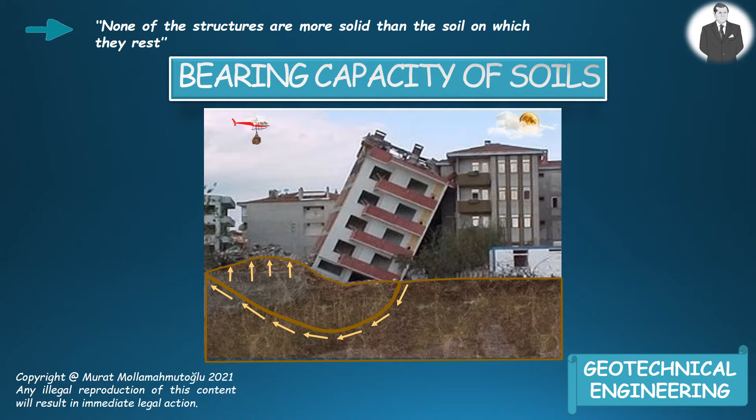Welcome to lecture. What I would like to present to you today is bearing capacity of soils with respect to shallow foundations. The lowest part of a structure is usually named as foundation, as you see in the figure here. And its duty is to deliver the load of the structure to the soil where it is resting.

Suitable design needs that the load transmitted should not overstress the soil, because overstressing of soil might bring about excessive settlement or shear failure of soil, which would impair the structure. Therefore, for geotechnical and structural engineers interested in foundation design, it is vital to evaluate the safe bearing capacity of soils. A foundation design has to satisfy two fundamental requirements.

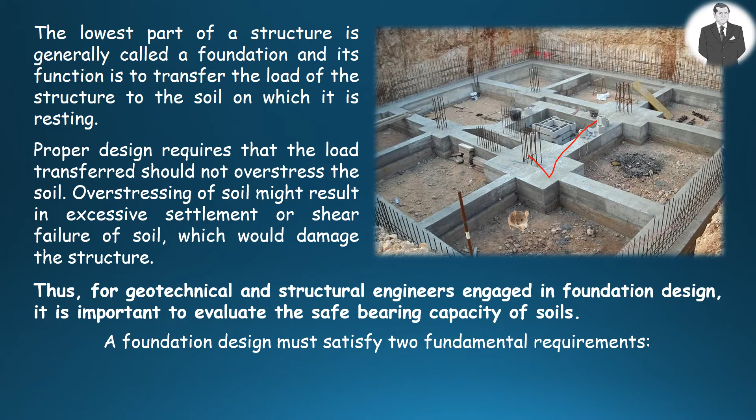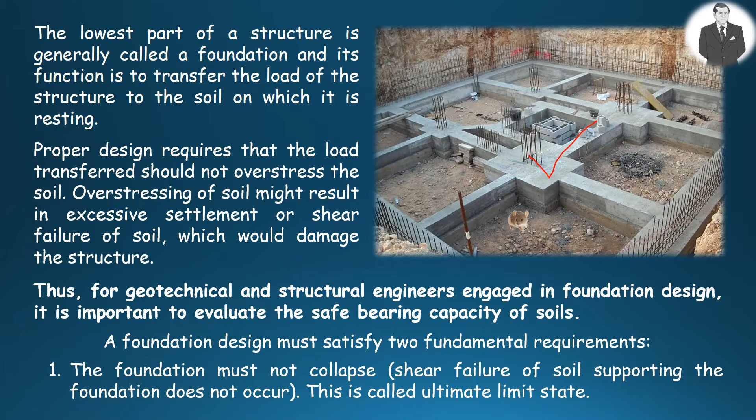The first one is the foundation must not fall down. That is to say, the shear failure of soil supporting the foundation does not take place. This is called the ultimate limit state. The second one is settlement of foundation must be within tolerable limits so that the design function of the structure is not damaged. This is called serviceability limit.

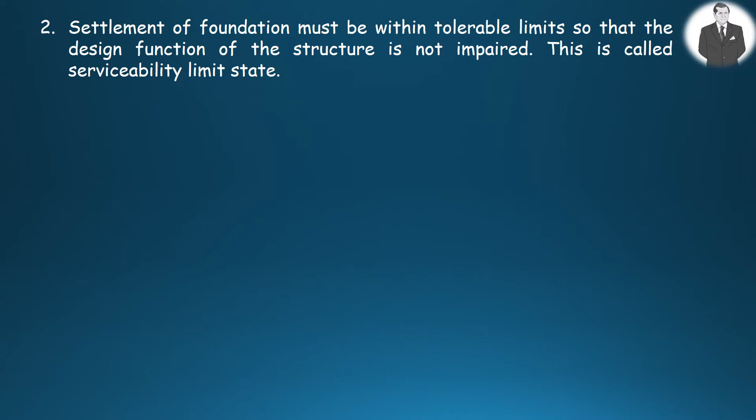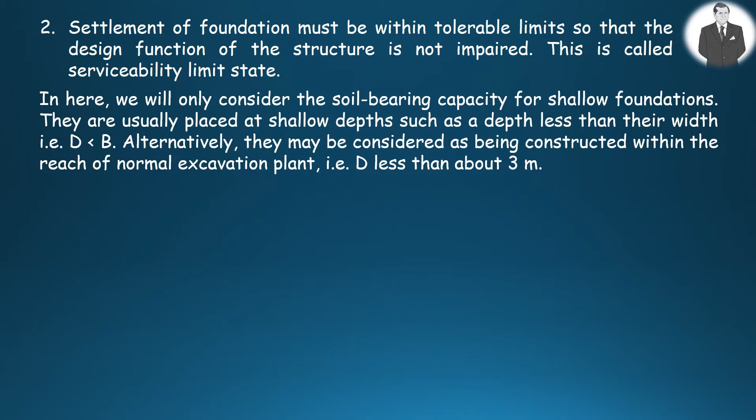There are two design procedures adopted in practice. One is allowable stress design, which is ASD in short, and the other is load and resistance factor design, which is LRFD in short. In ASD design method, the ultimate load resistance is obtained, and then this is divided by a factor of safety to get the allowable load or stress. ASD is the conventional design method. LRFD is dependent on reliability methods regarding the uncertainties in loads, soil resistance, method of analysis, and construction. The loads are multiplied by load factors, usually greater than 1, in different combinations, and the ultimate soil resistance is multiplied by a factor called the performance factor, usually less than 1.

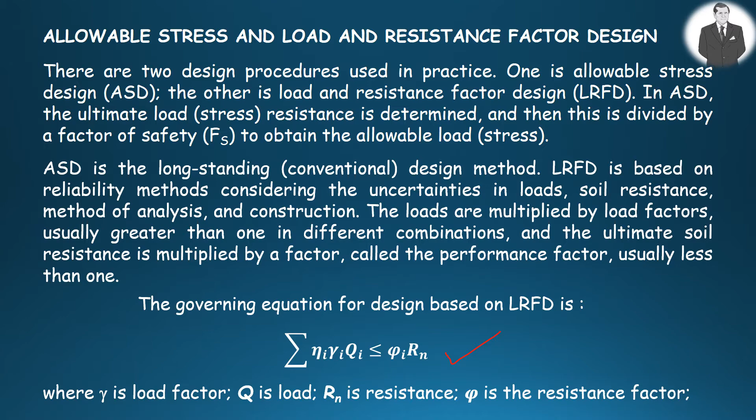The governing equation for design dependent on LRFD is given here, where gamma is load factor, Q is load, capital R sub n is resistance, and phi is the resistance factor. Gamma and phi are the same symbols as unit weight and the internal friction angle of soil, so do not mix them. Eta is a ductility, redundancy, and importance factor. And i is the load type, such as dead load or live load, and the resistance type.

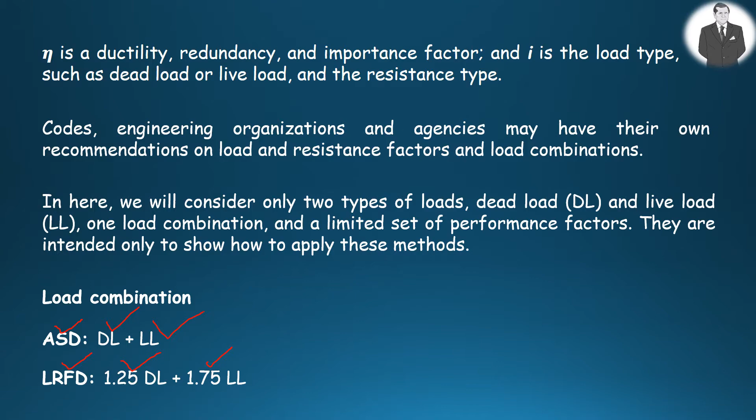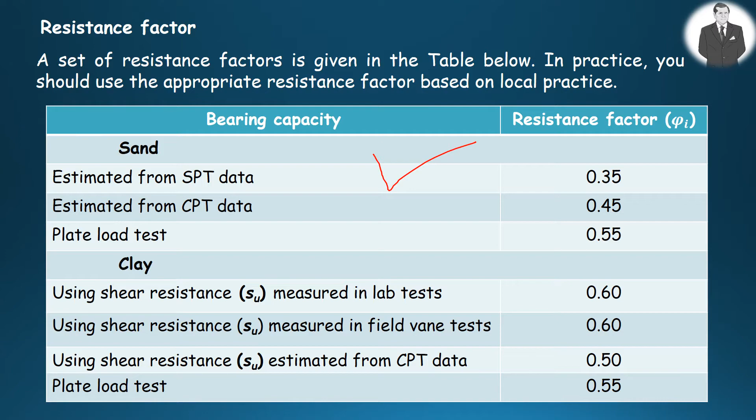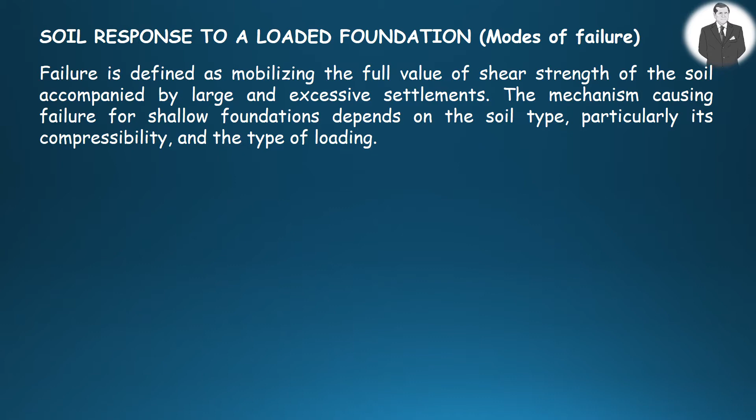The second type of failure mode is called local shear failure. Its characteristics are well-defined slip surfaces just below the foundation, but these slip surfaces fail to extend to the ground level. Large vertical displacements are needed before the slip surfaces appear at ground level. Some heaving takes place on both sides, as you see in the figure, with no tilting and no catastrophic failure of foundation, and no peak value and ultimate value not defined, as you see in the figure here. This type of failure takes place in moderate compressible soil and medium dense sands.

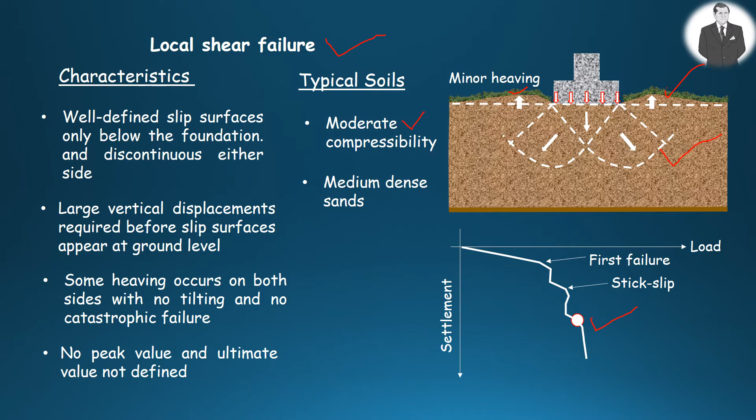The third type of failure mode is named punching shear failure. Its characteristics are well-defined slip surfaces only below the foundation, as you see here, and they don't spread on both sides. Large vertical displacements are produced by soil compressibility, with no heaving, no tilting or catastrophic failure. And there is no ultimate value, as you see in the figure here. Compression will densify the soil.

This type of failure takes place in highly compressible soils: very loose sands, partially saturated clays, normally consolidated clay in drained condition when the soil is subjected to very slow loading, and peats, in other words, organic soils.

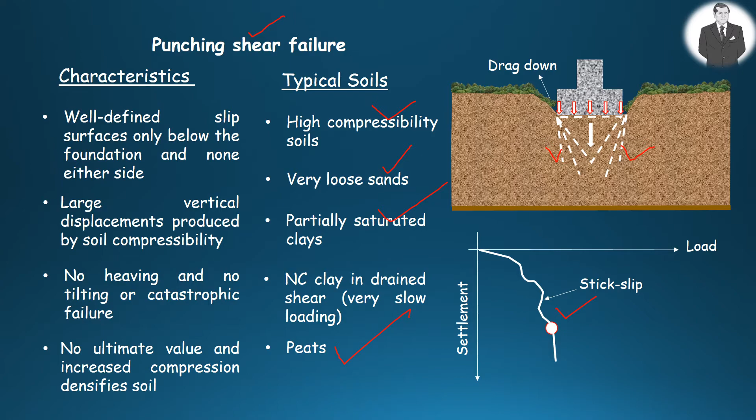An expression for bearing capacity is dependent on the failure mechanism for a rough strip footing embedded at a depth Df measured from the ground surface, as you see in the figure, where the soil in zones 1, 2, and 3 is in a state of plastic equilibrium. The active Rankine zone is pushed downwards, and in turn this pushes the radial shear zones sideways and the passive Rankine zones both sideways and upwards. The rupture lines JD and JE are arcs of a logarithmic spiral, as you see here.

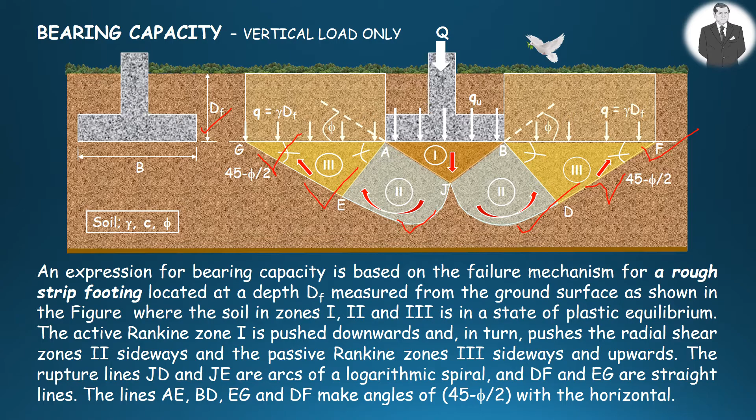DF and EG, as shown in the figure, are straight lines. The lines AE, BD, EG, and DF make angles of 45 minus phi over 2, as illustrated in the figure here. If the load per unit area is applied to the footing, as you see here in the free body diagram of the soil wedge, and if general shear failure takes place, we may say that passive force is acting on each face of the soil wedge ABJ, as you see in the figure here. In this case, passive force should be inclined at an angle phi to the perpendicular drawn to the wedge faces. Since AJ and BJ are inclined at an angle phi to the horizontal, the direction of passive forces should be vertical.

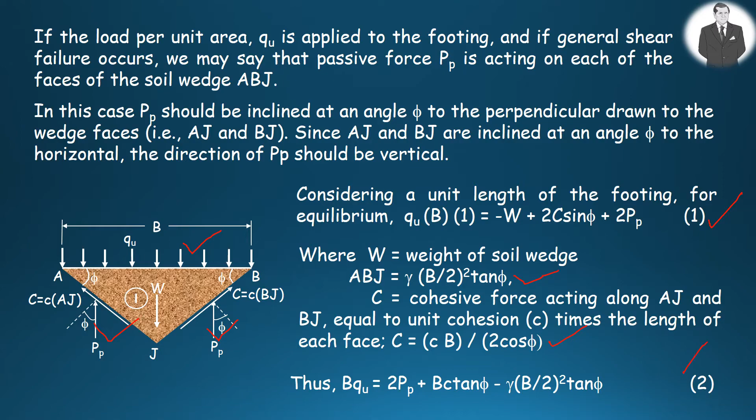Now, considering the free body diagram of the soil wedge and a unit length of the footing, for equilibrium, equation 1 can be written, where W is the weight of the soil wedge, and ABJ is equal to the definition given here, where C is the cohesive force acting along AJ and BJ, equal to unit cohesion times the length of each face, as expressed here. Therefore, equation 2 can simply be obtained. Substituting equation 2 into equation 1, we get equation 4 as presented here. Equation 4 can be written in the form given in equation 5.

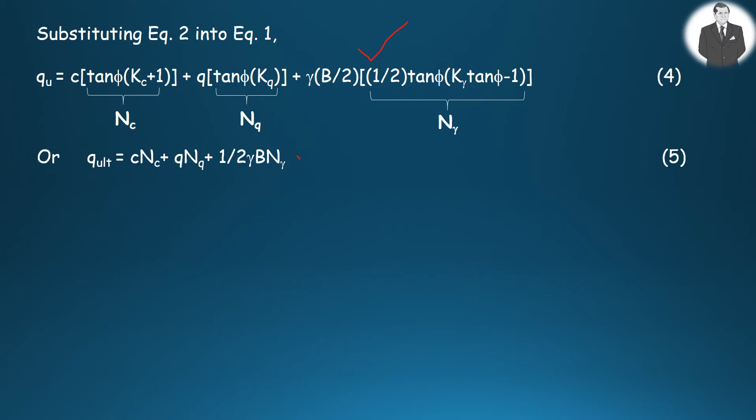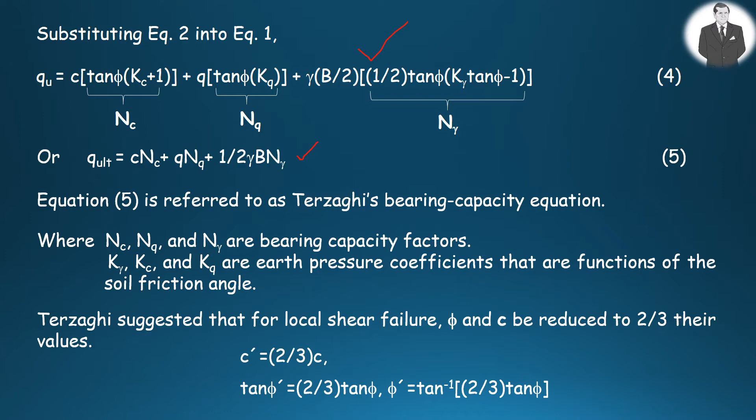This equation is referred to as Terzaghi's bearing capacity equation, in which Nc, Nq, and N gamma are bearing capacity factors. K gamma, Kc, and Kq are earth pressure coefficients, which are functions of the soil friction angle. Terzaghi recommended that for local shear failure, the internal friction angle and the cohesion should be reduced to 0.67 times their values, or as formulated here. Nevertheless, we will consider only the equations for general shear failure that has gained common use in geotechnical practice.

After the development of Terzaghi's bearing capacity equation, several researchers such as Meyerhof, Hansen, and Vesic worked in this area and clarified the solution. Different solutions show that the bearing capacity factors Nc and Nq do not change much and are recommended as follows. However, for a given value of phi, the values of N gamma obtained by the above-mentioned researchers vary widely. The difference is due to the variation of the assumption of the wedge shape of soil located directly beneath the footing. So, the more conservative expression is given by Hansen. But for all practical purposes, keep in mind that Terzaghi's bearing capacity factors will lead to good results.

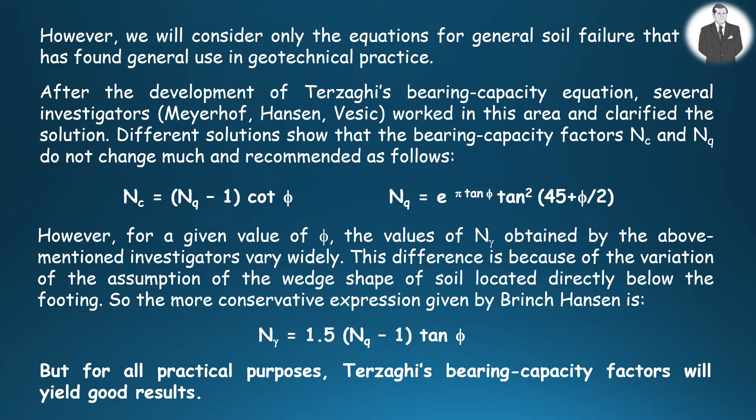The soil bearing capacity equation for a strip footing produced by Terzaghi is modified for general use by including the following factors. Since the Terzaghi equation was produced for a strip foundation where the shearing of soil was presumed in only 2 dimensions, however, for rectangular foundations, the shearing of soil will also happen at the ends, causing an enhanced end effect. On the other hand, for circular and square foundations, a 3-dimensional mass of soil will be sheared.

These effects are taken into account in a semi-empirical manner by modifying the equation using the shape factors Sc and Sq. The shape factor S gamma, related to the self-weight term, provides a reduction of bearing capacity due to shape because of the reduced confinement of the soil provided by rectangular, square, or circular foundations. Shape factors from Hansen are adopted here and given below.

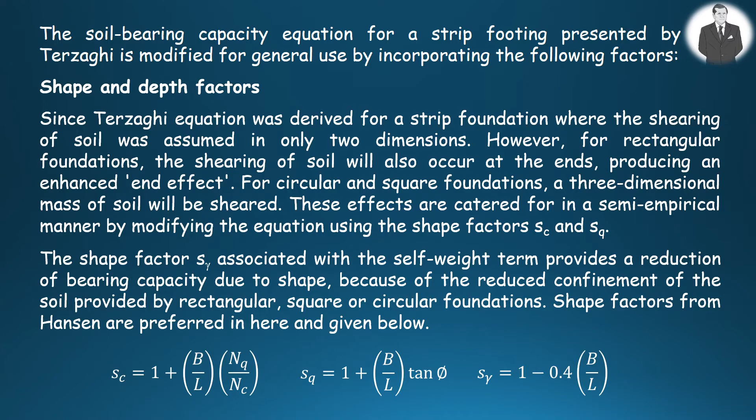Depth factors contribute to the bearing capacity of soil, which could be obtained from shearing through the soil above the foundation level. Expressions for depth factors taken from Hansen are presented here. And when D sub F is greater than B, which means when the embedded depth of foundation is greater than its width, D sub F over B should be replaced by tangent to the power of -1 times D sub F over B.

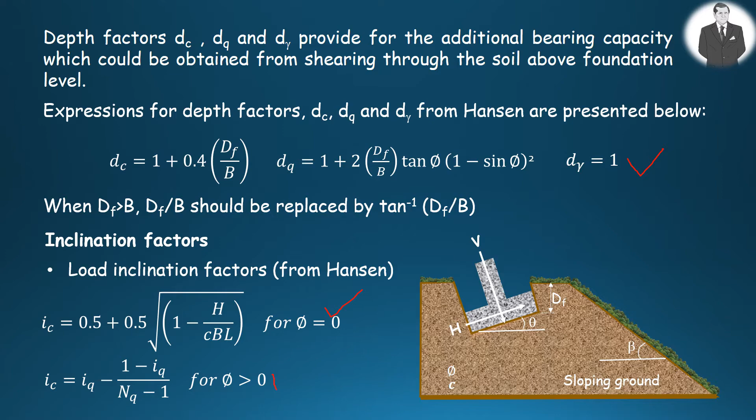Inclination factors are also adopted from Hansen. When the internal friction angle is 0, we use the first expression. When the internal friction angle is greater than 0, we use the second expression. Other inclination factors are also presented here.

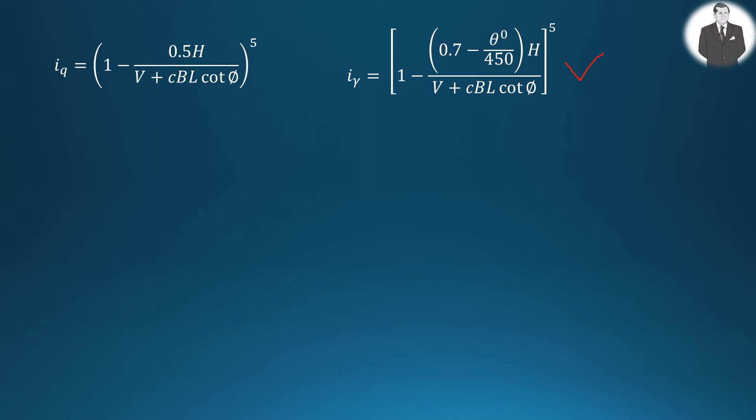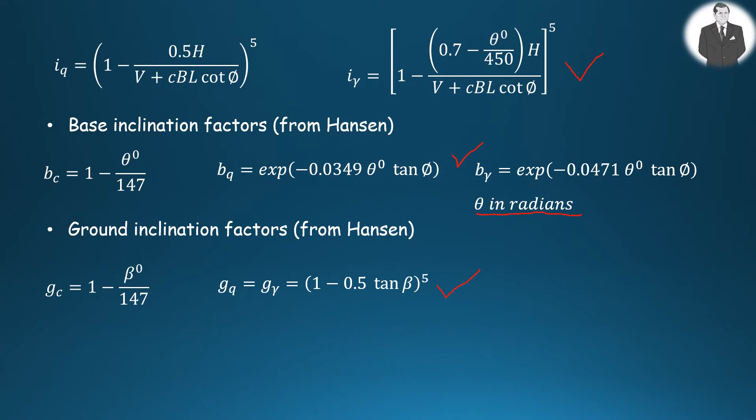Base inclination factors adopted from Hansen are also shown here. Bear in mind that theta to be used in these expressions should be in radians. And finally, ground inclination factors. They are taken from Hansen as well and given here. Now, including all these factors in the general bearing capacity equation put forward by Terzaghi, we get the modified general bearing capacity as shown here.

The question is, it appears that there are several general equations for estimating soil bearing capacity currently in use, put forward by Terzaghi, Meyerhof, Hansen, and Vesic. Are there any differences between them? Or which one is preferable? Well, as a result of observations, the following can be considered in selecting one of them.

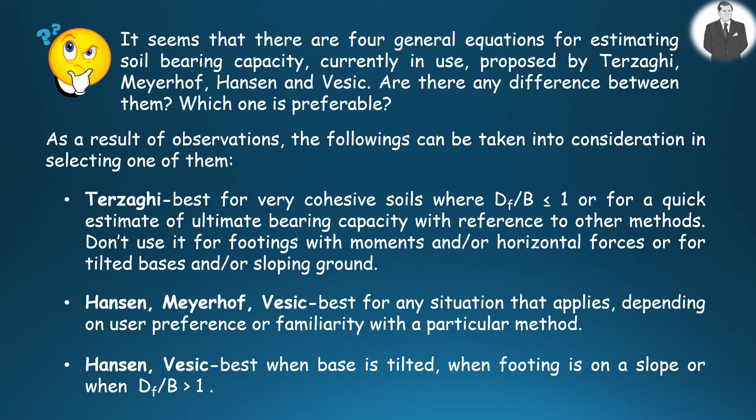Terzaghi is best for very cohesive soils where D sub F over B is less than or equal to unity, or for a quick estimate of ultimate bearing capacity with reference to other methods. But don't use it for footings with moments and/or horizontal forces, or for tilted bases and sloping ground. Hansen, Meyerhof, and Vesic are best for any situation that applies, depending on the user's choice or familiarity with a particular method. Hansen and Vesic are best when the base is tilted, when the footing is on a slope, or when D sub F over B is greater than unity.

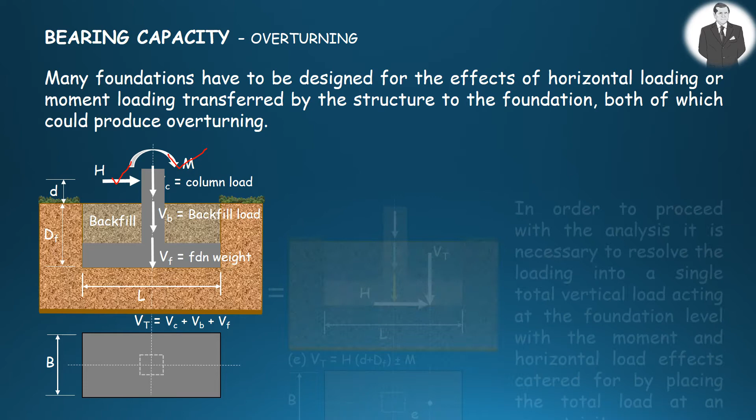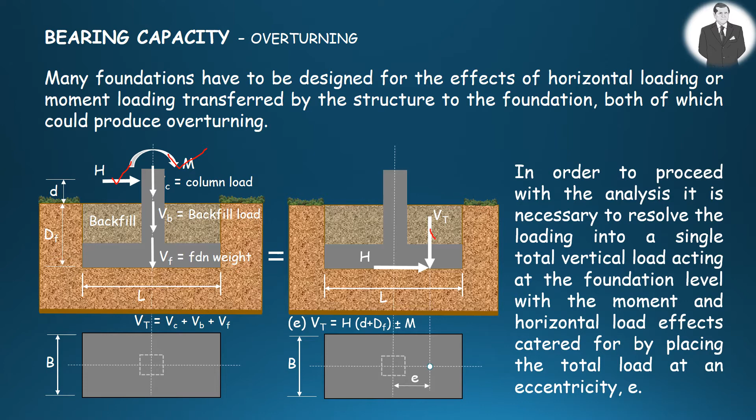Many foundations have to be designed for the effects of horizontal loading or moment loading delivered by the structure to the foundation, both of which could lead to overturning. In order to carry out the analysis, it is vital to resolve the loading into a single total vertical load acting at the foundation level, with the moment and horizontal load effects taken into consideration by placing the total load at an eccentricity E as shown in the figure.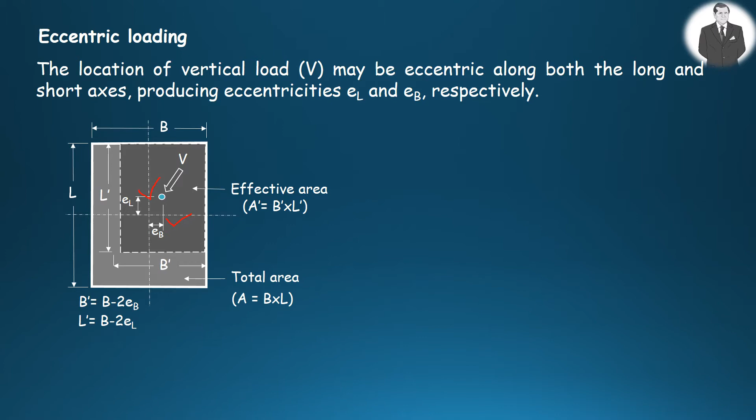The location of the vertical load may be eccentric along both the long and short axis, as you see in the figure here, leading to eccentricities E sub L and E sub B respectively. A convenient and conservative approach assumes that the vertical load acts centrally on an effective foundation area, as you see in the figure, ignoring the area outside of this effective area. So the bearing capacity equation for central vertical loading can be employed. So the general bearing capacity expression is then rearranged accordingly as shown here.

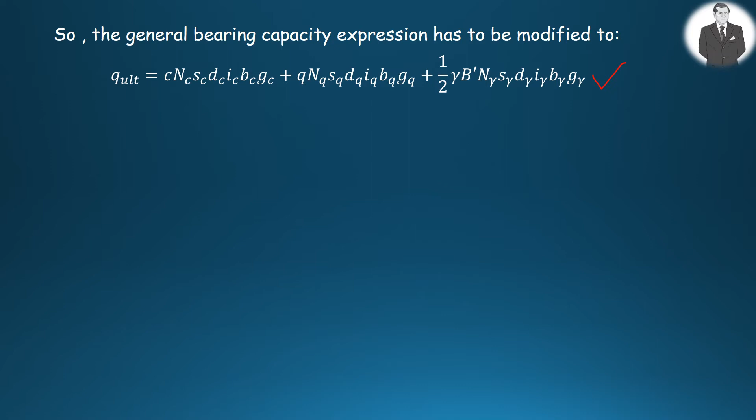Are there other factors that may affect the bearing capacity of soil? Yes, different soil strength. The undrained condition in clay soil, which is the short-term condition: the bearing capacity of cohesive soils with low permeability is the most critical one immediately after construction, before the excess pore pressure has time to dissipate. This is the undrained condition. In this case, the shear strength parameters are represented by undrained cohesion intercept or undrained shear strength, and undrained internal friction angle, which is equal to 0. This condition will lead to the bearing capacity expression as formulated here.

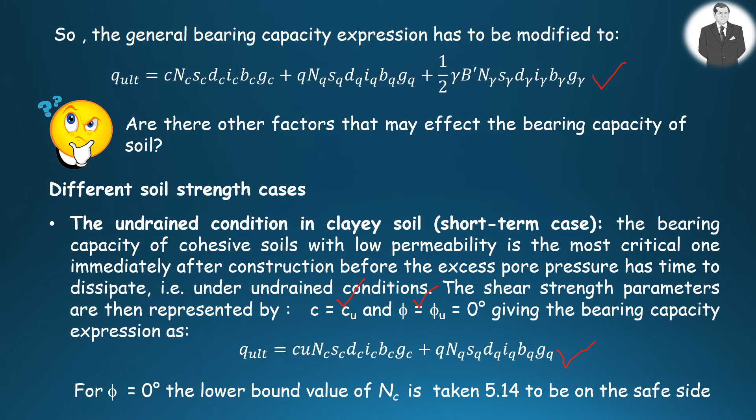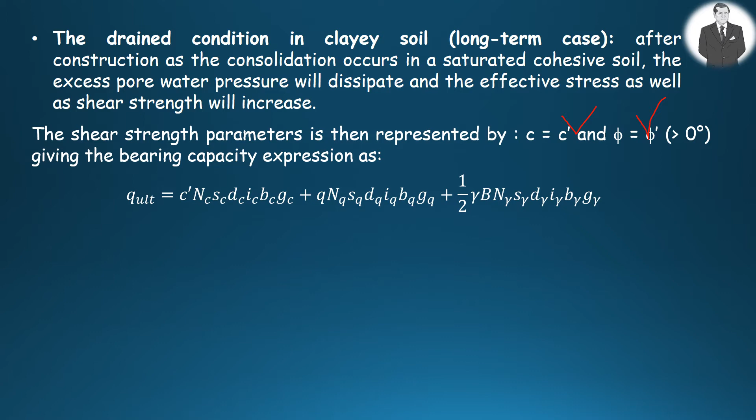For internal friction angle equal to 0, the lower bound value of N sub C is then taken as 5.14 to be on the safe side. The drained condition in clayey soil, which is the long-term case. After construction, as consolidation takes place in a saturated cohesive soil, the excess pore pressure will dissipate and the effective stress will increase, thus increasing the shear strength of soil. Shear strength parameters are then represented by C prime and phi prime, which is greater than 0. And the ultimate bearing capacity should be rearranged accordingly as shown here.

Now, another condition is the drained condition in sand, short and long-term cases. The allowable bearing capacity of sand depends primarily on the relative density, stress history, the position of water with respect to foundation level, and the size of the footing. Of secondary importance are particle shape and size distribution. The shear strength parameters are then represented by C prime and phi prime. Phi prime is greater than 0. And the bearing capacity formula should be rearranged accordingly as presented here.

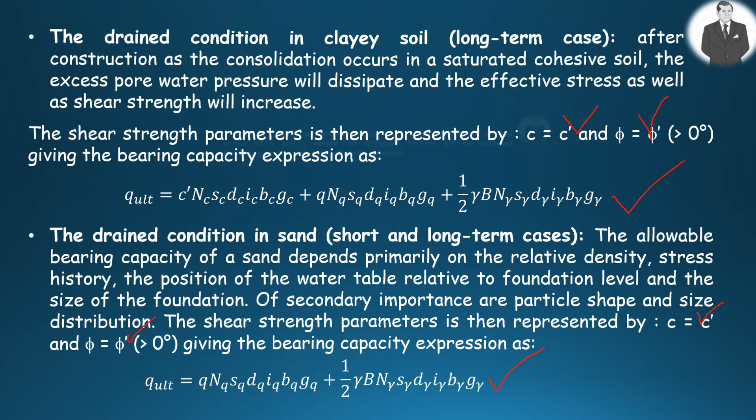Shape, depth, and inclination factors depend on the choice of cohesion intercept and internal friction values as well. Therefore, different factors will be obtained based on the soil strength case assumed.

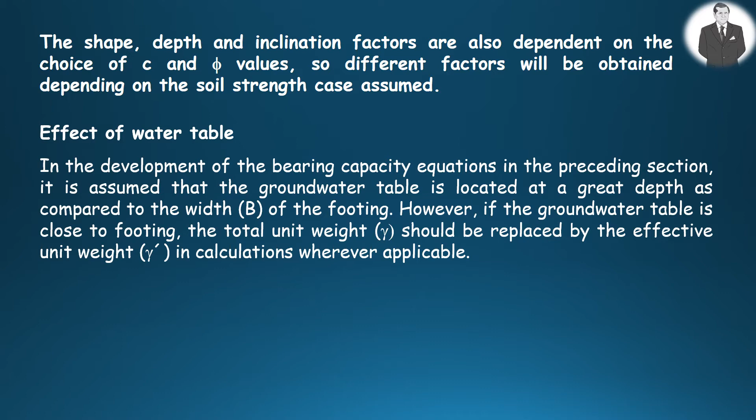In the derivation of the bearing capacity equations in the previous section, it is presumed that the groundwater table is located at a great depth with respect to the width of the footing. Nevertheless, if the groundwater table is close to the footing, the total unit weight should be replaced by the effective unit weight in calculations wherever applicable. Now, if the water table lies B meters, which is the width of the footing as you see in the figure, or more below the foundation base, then the general bearing capacity equation does not need modification.

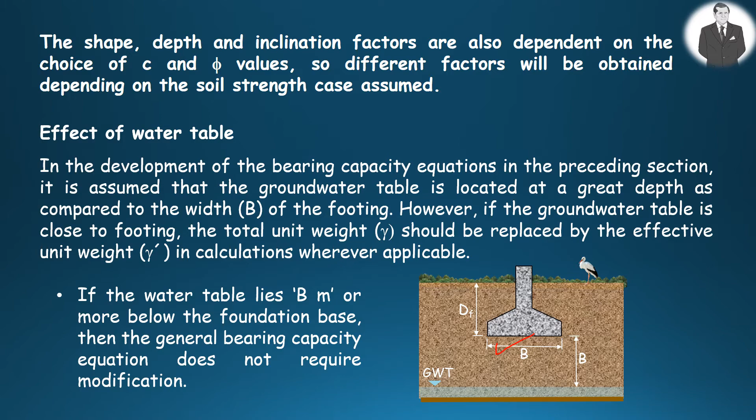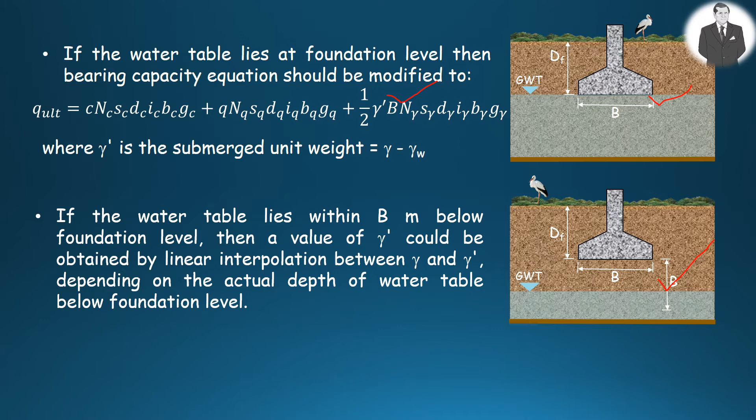If the water table is just beneath the base of the footing as shown in the figure, then the bearing capacity equation should be modified accordingly, where gamma prime is the submerged unit weight of soil. If the water table lies within B meters below the foundation level, as illustrated in the figure here, then a value of gamma prime could be obtained by linear interpolation between total and effective unit weight depending on the actual depth of the water table beneath the foundation level. Since the water table is likely to fluctuate during the life of the structure, it would be reasonable to adopt gamma prime regardless of water table.

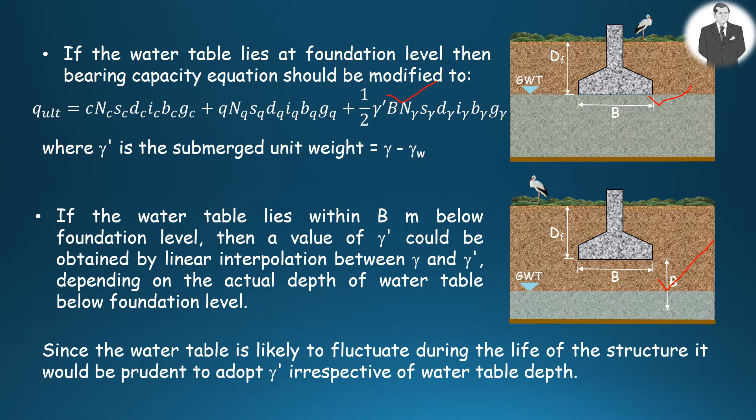If the water table is above the base of the footing as shown in the figure here, or at the ground surface, then the bearing capacity equation should be altered accordingly as illustrated here, where q prime is equal to gamma prime times h sub w. H sub w is the height of water from the base of the footing.

No simple satisfactory analytical method is now available to determine the bearing capacity of layered soils. A geotechnical engineer can apply a set of practical guidelines or use numerical tools such as the finite element method for analyzing layered soils. The basic problem, however, lies in determining and defining the soil parameters for those soils. We will refer to some practical guidelines for three common cases: a soft clay over a stiff clay, a stiff clay over a soft clay, and thinly stratified soils.

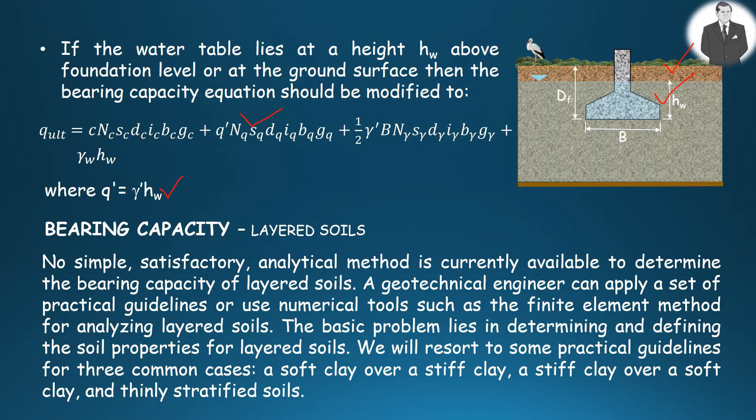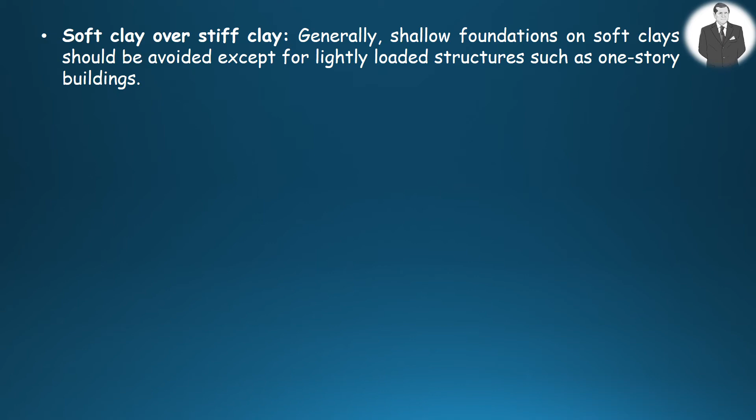Now, let us consider a soft clay layer over a stiff clay layer. Usually, shallow foundations on soft clays should be avoided, except for lightly loaded structures such as one-story buildings. Removing the soft clay and replacing it with compacted fill should be taken into consideration. Nevertheless, the bearing capacity using the methods described earlier should be computed before making a decision to replace the soft clay layer.

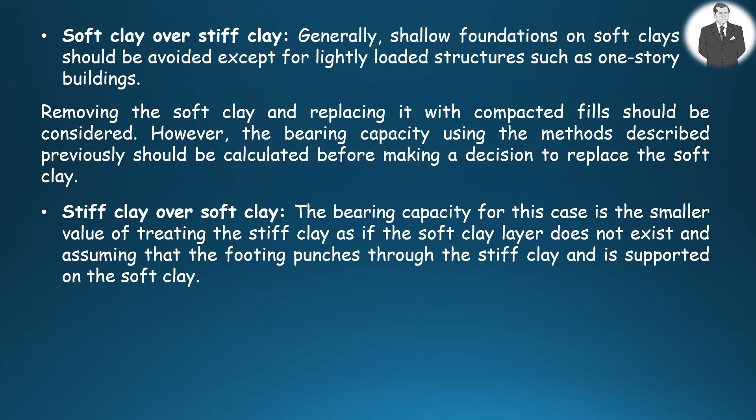Stiff clay layer over a soft clay layer. The bearing capacity for this case is the smaller value of treating the stiff clay as if the soft clay layer does not exist, and assuming that the footing punches through the stiff clay and is supported on the soft clay layer. The bearing capacity is the sum of the shear required to punch through a vertical plane in the stiff clay and the bearing capacity of the soft clay layer. Only a fraction, about 2/3 to 1/2, of the undrained shear strength should be employed in the calculation of the shear resistance on the vertical plane in the stiff clay layer.

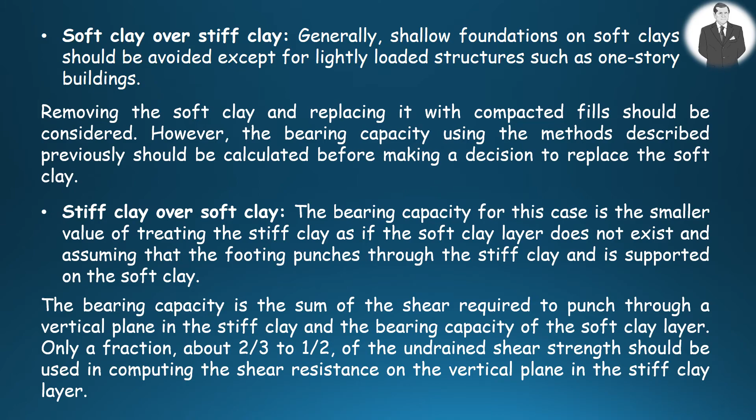Another method is to place an imaginary footing on the soft clay layer with dimensions B plus T_sc times L plus T_sc, where B and L are the width and length of the foundation, and T_sc is the thickness of the stiff clay layer below the base of the footing, and then calculate the ultimate net bearing capacity using bearing capacity equations.

Thinly stratified soils. Under these circumstances, deep foundations should be preferred. If deep foundations are not cost-effective, then the bearing capacity can be computed by using the shear strength parameters for the weakest layer. Alternatively, harmonic mean values for c and phi can be calculated, and then these values can be used to calculate the bearing capacity.

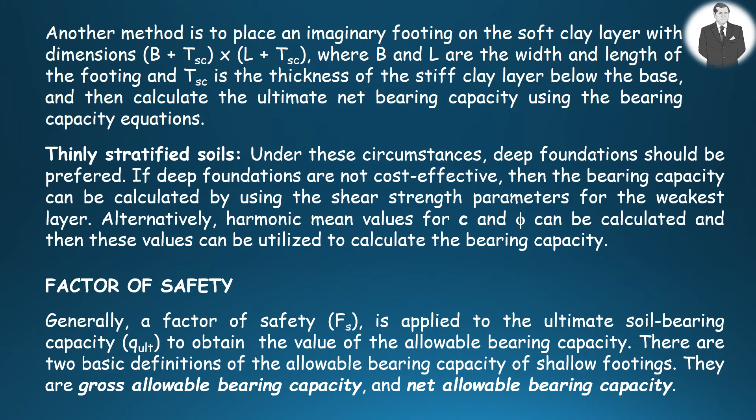Generally, a factor of safety is applied to the ultimate soil bearing capacity to obtain the value of allowable bearing capacity. There are two basic definitions of the allowable bearing capacity of shallow foundations. They are gross allowable bearing capacity and net allowable bearing capacity. Let us see what they are.

Q ultimate is usually regarded as the gross ultimate bearing capacity. Therefore, the net ultimate bearing capacity is the gross ultimate bearing capacity minus the weight of excavated soil, gamma times D sub f, with gamma as the unit weight of foundation soil and D sub f as the depth of foundation, as illustrated in the figure here. This is used to obtain the net allowable bearing capacity, which is a ratio between Q ultimate net bearing capacity and the factor of safety. On the other hand, the gross allowable bearing capacity can be computed as Q ultimate net divided by factor of safety plus the weight of excavated soil.

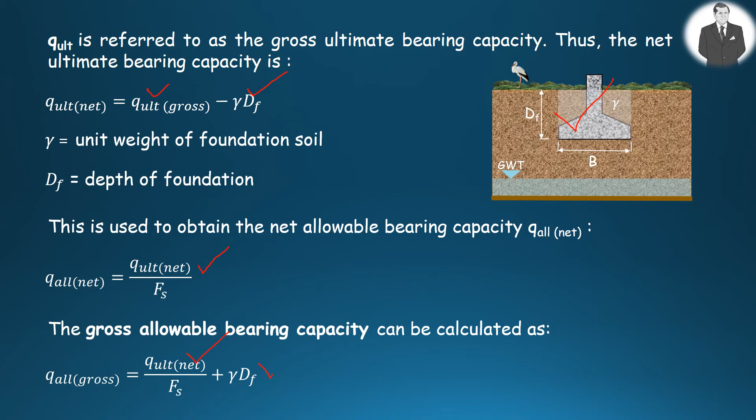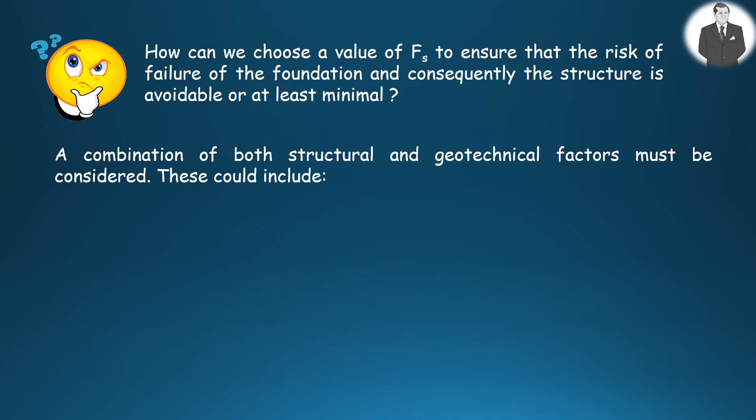The question is, how can we select a value of factor of safety to make sure that the risk of failure of the foundation as well as the structure is avoidable or at least minimized? For these, a combination of both structural and geotechnical factors has to be considered. These may include the following:

The ambiguity of loading, specifically with non-routine buildings and live loading effects which are difficult to predict. For example, wind, water forces, moving loads, dynamic forces. The possibility of maximum design load. Again, for non-routine structures, it is probable that unfavorable changes of loading will happen, whereas routine buildings are often designed on nominal loading, which is not likely to happen.

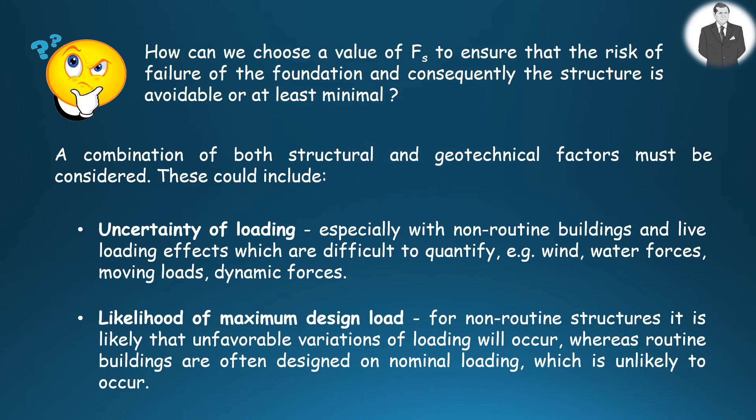Other factors are the results of failure. Public expect less risk to be taken with structures, the failure of which could bring about catastrophic consequences. More risk is taken with temporary works than permanent ones. The ambiguity of soil model, inaccuracy of strength values, water table fluctuations, mode of failure, limitation of analytical method, all provide uncertainty.

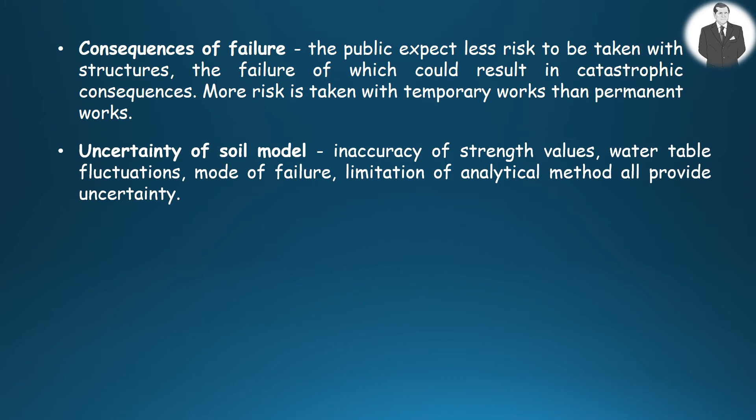The coverage of investigation: sufficient depth, layering of deposits, uniformity of ground conditions, number of tests. The more extensive the site investigation, the more confidence there will be in the choice of the soil model. The factor of safety values regarding the above points are presented in the table below for the design of shallow foundations.

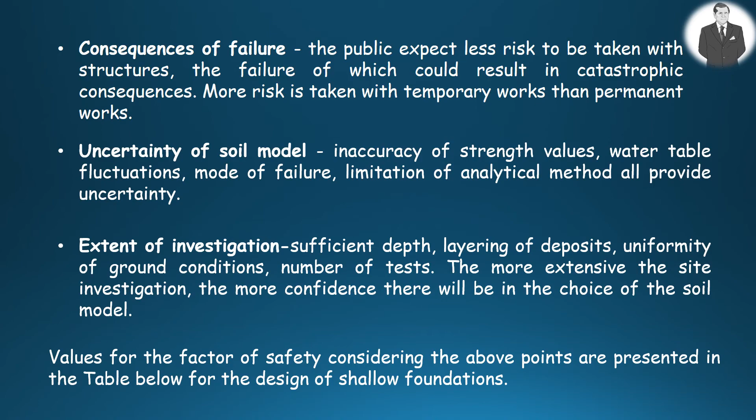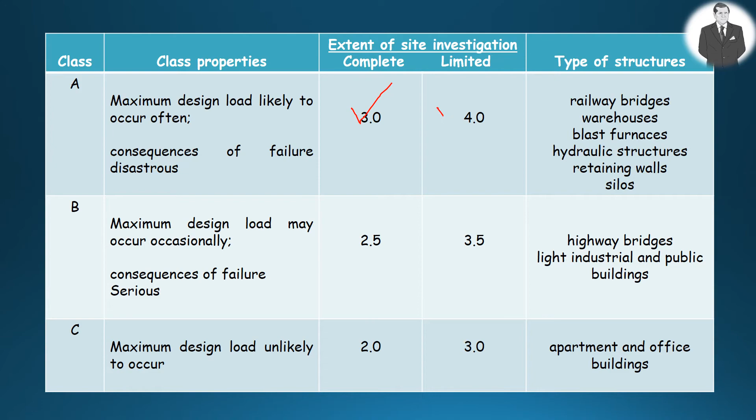Now, let me give you an example of how to use the table and you will read the rest. Suppose that you are planning a hydraulic structure such as a dam, and you know that in this project maximum design load is likely to happen and the consequences of failure will be catastrophic. So you go to the site investigation report, examine it carefully, and if you decide that the report is complete, then you can select a factor of safety of 3. Or if you think that it is not complete, there are some missing points or uncertainties, then you will adopt a factor of safety of 4. That's it.

Now let us continue with practical examples. The first one is, as you see in the figure, a rectangular building foundation of 2.5 meter wide and 3.5 meter long, placed at a depth of 1.7 meter below the ground surface in a thick deposit of firm saturated clay, is needed to support a dead load of 1050 kilonewton and a live load of 975 kilonewton. The water table is at 1.2 meter below the ground surface, and the related soil parameters are as follows.

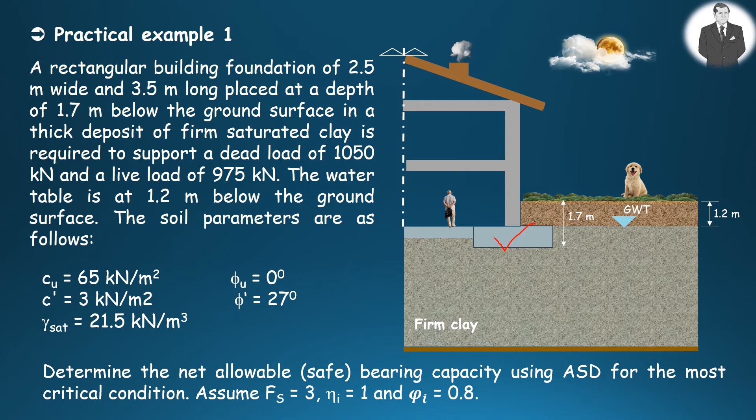Now, you are required to determine the net allowable, in other words, safe bearing capacity using ASD for the most critical condition. And the local codes suggest that a factor of safety 3, eta of unity, and phi of 0.8 should be adopted. The most critical condition in this example is the undrained one. That is to say, when the internal friction angle is 0 for saturated clay soil.

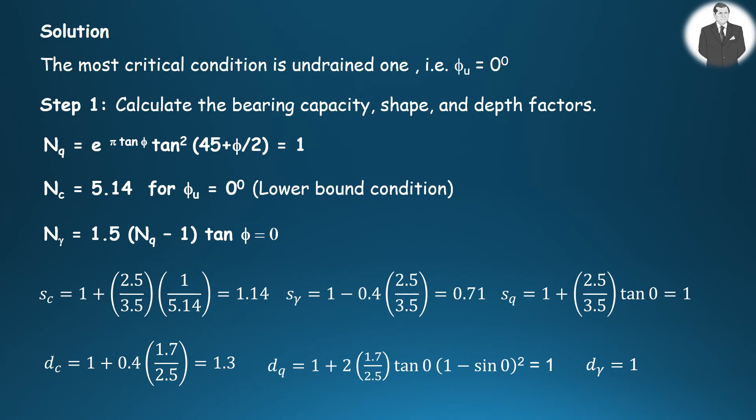In this case, the first step is to calculate the bearing capacity, shape, and depth factors. They are already done for you. The second step is to calculate the ultimate and allowable bearing capacity. For undrained condition, the related ultimate gross bearing capacity is as given here. After computing the ultimate gross bearing capacity, q ultimate net, which is the ultimate net bearing capacity, can be obtained as the difference between the ultimate gross bearing capacity minus the weight of excavated soil. And then, if you divide q ultimate by a factor of safety, you get the allowable net bearing capacity.

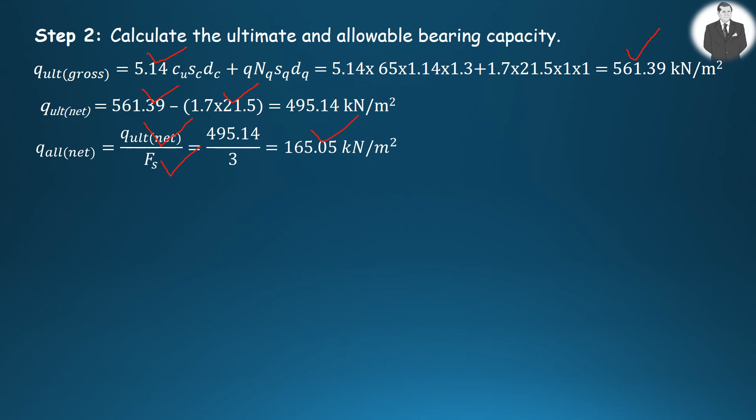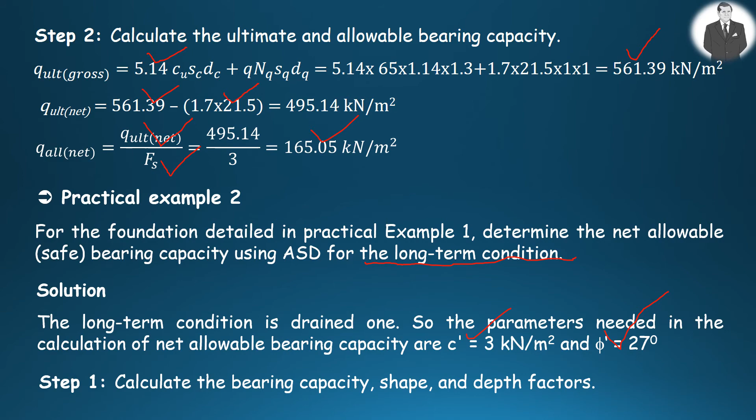Example 2. For the foundation given in example 1, determine the net allowable bearing capacity using allowable stress design for the long-term condition. The long-term condition is the drained one. So the parameters required in the calculation of net allowable bearing capacity are c prime and phi prime. In this context, the first step is to calculate the bearing capacity, shape, and depth factors. As you see, the bearing capacity factors, the shape factors, and depth factors are calculated for you.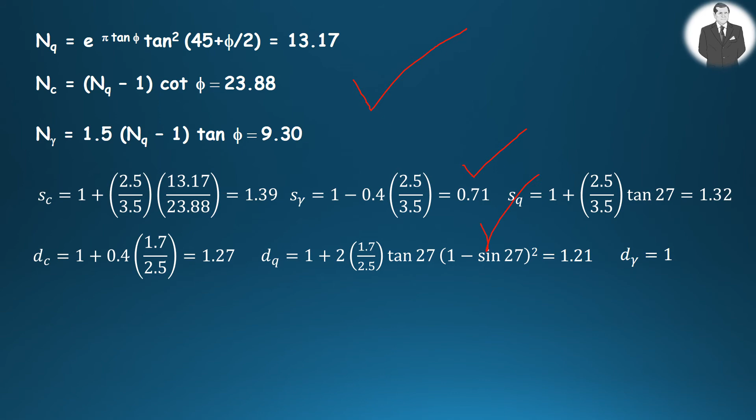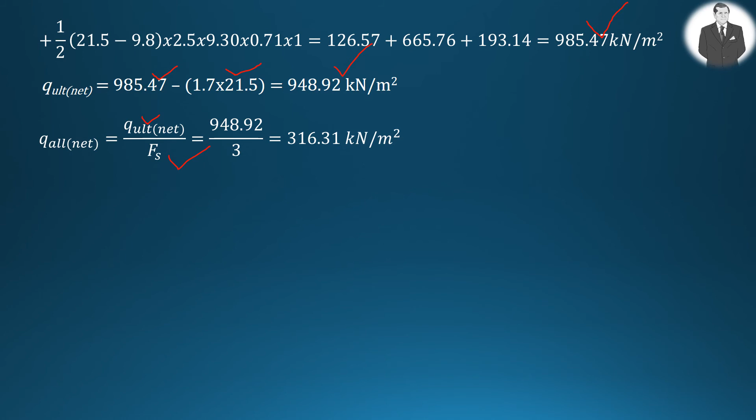The second step is to calculate the ultimate and allowable bearing capacity for the drained condition. So remembering the ultimate gross bearing capacity equation as given here and putting the related data in their places, the gross bearing capacity is then calculated as given here. As explained before, the ultimate net bearing capacity is the difference between the gross ultimate bearing capacity minus the weight of excavated soil. And the allowable net bearing capacity is the ratio between the ultimate net bearing capacity and the factor of safety. These are already calculated for you.

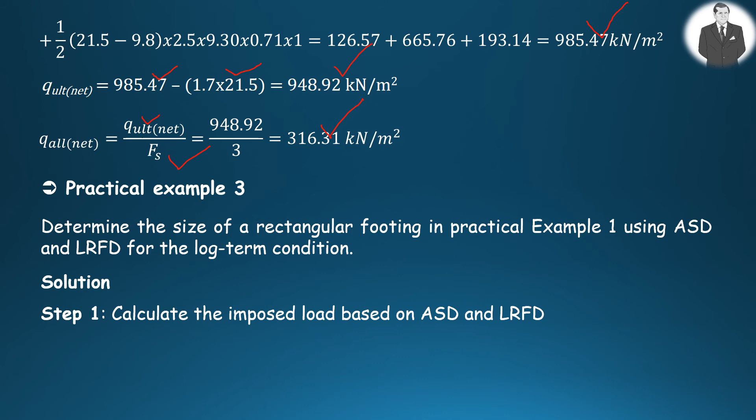Example 3. Determine the size of the rectangular footing in example 1 using allowable stress design and load and resistance factor design for the long-term condition. The first step is to calculate the imposed load based on ASD and LRFD. These are done for you. It is very simple and you know what they are.

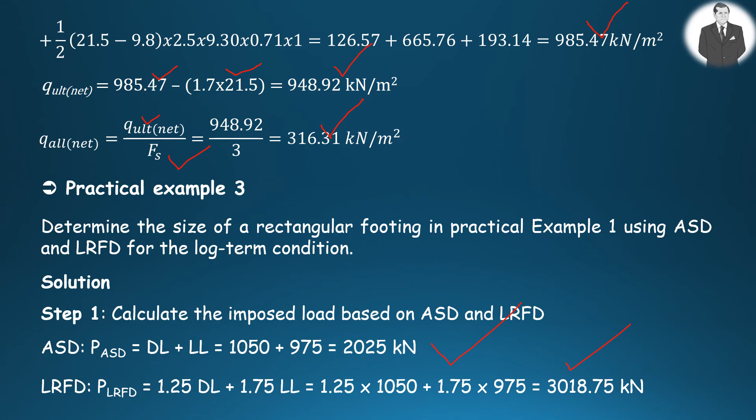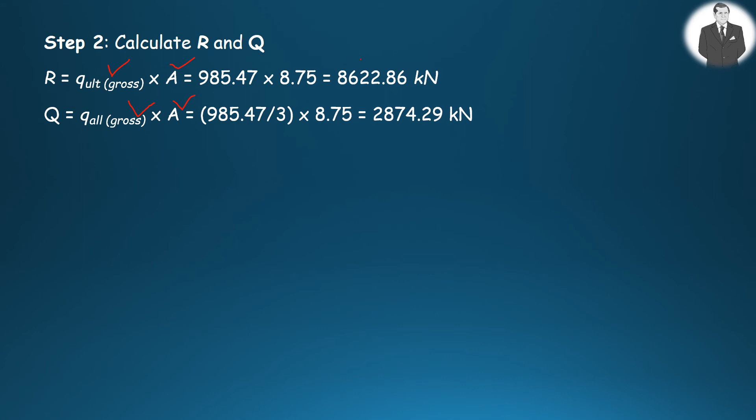Step 2 is to calculate R and Q. For these, we need Q ultimate gross and Q allowable gross. They are already calculated. If we multiply these values by the cross-sectional area of the rectangular footing, we get R and Q as illustrated.

Now the third step, check the suitability of foundation size. For this, we need to obtain factored R, which is 0.8 times R. This is greater than the factored live load plus dead load, so the foundation size is acceptable. Regarding allowable stress design, the load, which is calculated here, is also greater than the total vertical load, which is dead load plus live load.

So in this case, the footing size is also acceptable. But the question is, what if the foundation size is unacceptable? Well, you will try other footing sizes until you meet the requirement. That's it.

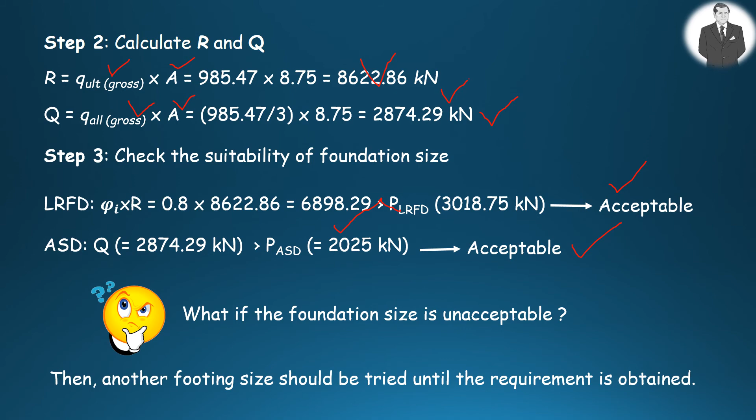Final example. The rectangular footing in example 1 is 0.5 meter thick and backfilled with soil of unit weight 19.5 kilonewton per cubic meter. If the column with a vertical dead load of 1050 kilonewton and a live load of 975 kilonewton is placed 0.6 meter away from the center of the foundation on the long axis, what will be the net bearing capacity and the factor of safety against general shear failure for short-term condition?

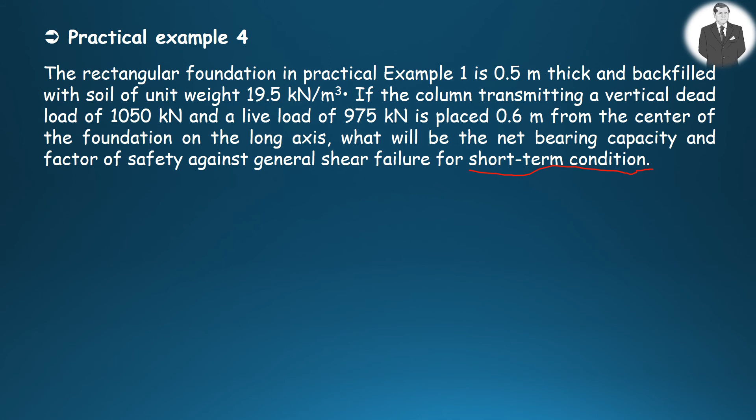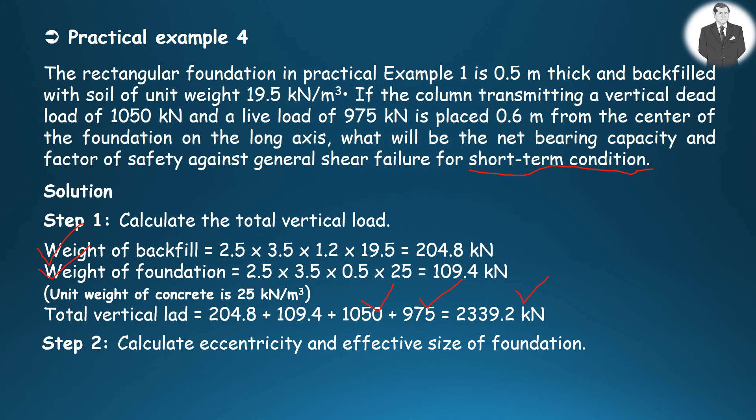In the solution of this problem, the first step is to calculate the total vertical load, which is the summation of the weight of backfill, the weight of foundation, the dead load, and the live load, which is around 2,339.2 kilonewton. In the second step, the eccentricity and the effective size of footing should be calculated. We have only one-way eccentricity, which is along the long axis. This means that the width of footing will not change, but the length of footing will be reduced due to eccentricity, and the amount of reduction is about 2 times the eccentricity.

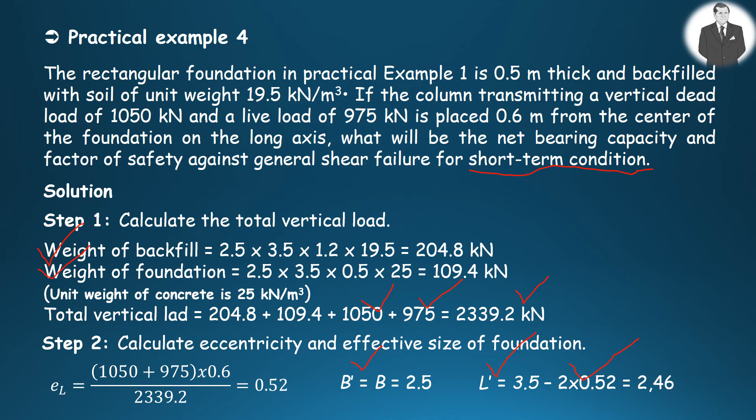In the third step, the bearing capacity, shape, and depth factors are computed. These are already done for you. The fourth step is to calculate the net ultimate bearing capacity and factor of safety. Now, based on the related equation, the ultimate gross bearing capacity is calculated. Ultimate net bearing capacity is the difference between ultimate gross bearing capacity and the weight of excavated soil.

Now, gross applied pressure is the ratio between the total vertical load acting on the foundation and the reduced area of footing due to eccentricity. So the net applied pressure will be the difference between gross applied pressure and the weight of excavated soil. The factor of safety can then be estimated as a ratio between the ultimate net bearing capacity and the net applied pressure, which is about 1.52.

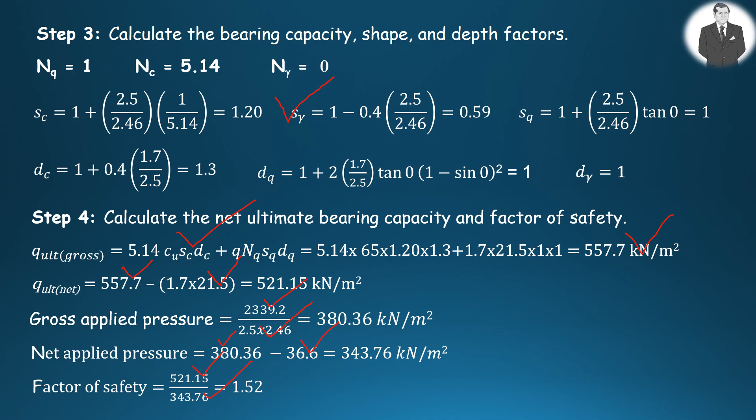Now then, it is quiz time. Let us recap what we have learned so far. The first question: which of the following factor or factors can affect the bearing capacity of soil? Which one? Yes, you got it. The answer is D.

All of them. The second question: a foundation design must satisfy two fundamental requirements, namely ultimate limit state and serviceability limit state. True or false? Well done. The answer is A. True. And the third question: LRFD considers uncertainties in what? Which one? No, it's not. Sorry, it is not. The answer is D. All of them.

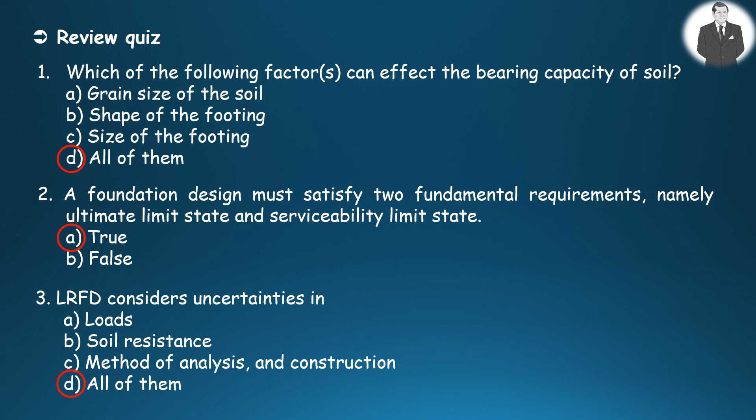The fourth question is: which of the following is not the characteristics of general shear failure? Which one? No, it's not. The answer is D. No peak value and ultimate value not defined. The fifth question: the earth pressure coefficients are functions of the soil friction angle. False or true? Which one? Yes, the answer is B. It's true.

And the sixth question: which of the following is incorrect? No, no, no, no. The answer is A. Terzaghi's equation is best for any situation, which is incorrect. Question 7. The bearing capacity of cohesive soils with low permeability is the most critical one immediately after construction. True or false? Yes, it is true. The answer is A. Good job.